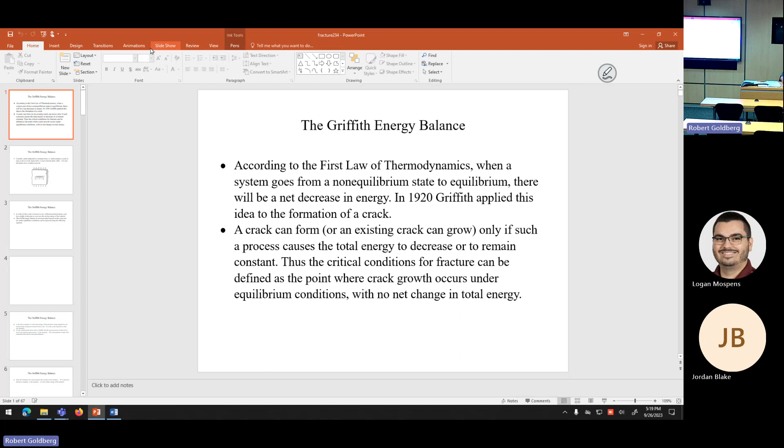Okay. So otherwise, here's my mouse. Here we go. And as far as I know, I shouldn't have any more travel for a while. So for the next period of time, we'll be just chugging along as usual.

And also, just to alleviate any worries you may have, if you follow the news, you've probably heard some talk of the potential of a government shutdown next week. But my teaching here has nothing to do with my job with the government. So even if the government shuts down, it will not affect class here in any way. If anything, I'll have a bit more time to devote to class prep and that type of thing.

So anyway, 2 weeks ago, at our last class, we started talking about fracture mechanics, and we first did the very simple maximum stress type of approach. But as we also talked about, there were some significant deficiencies with that methodology, which led other people to develop alternative methods of doing fracture analysis. So the first one we'll talk about is an energy balance approach that was developed by Griffith.

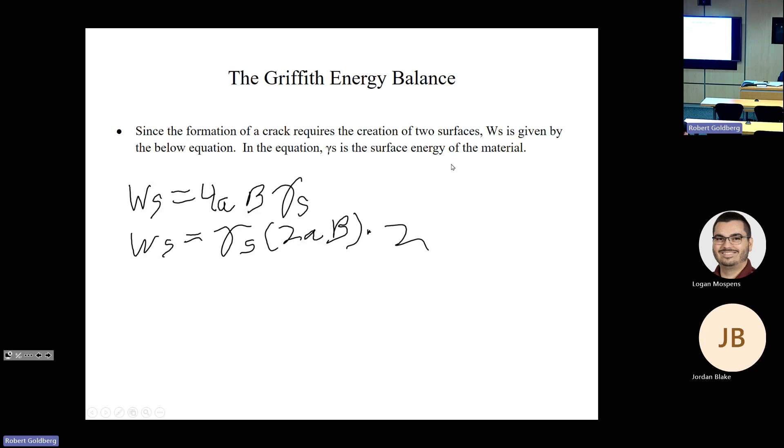And then we have to multiply this by 2 because, obviously, when we look here for a crack, we have 2 surfaces. We have the surface on the bottom, we have the surface on the top of the crack.

So what we're going to do is take these energy equations and assume a unit thickness. So our original potential energy equation was equal to capital pi equals the potential energy of the uncracked plate minus pi times sigma squared times a squared times b divided by E. And what we're going to assume for right now is that B is equal to 1.

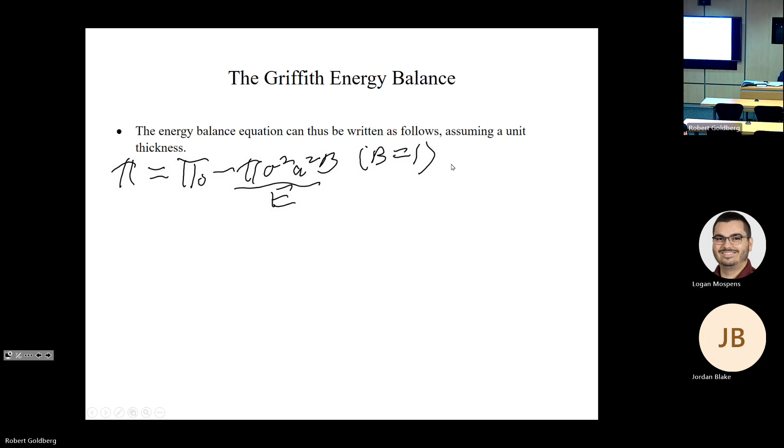So we can say that the negative, just to get rid of this minus sign here, of the derivative of the potential energy with respect to the half crack length A is equal to 2 times pi times sigma squared times A divided by E. And this is simply because the derivative of A squared is 2A. Everything else is constant. And likewise, we can say that our surface energy is equal to 4 times A times B, which we're assuming is equal to 1, times the surface energy. So the derivative of our surface energy with respect to the half crack length is just equal to 4 times the surface energy of the material.

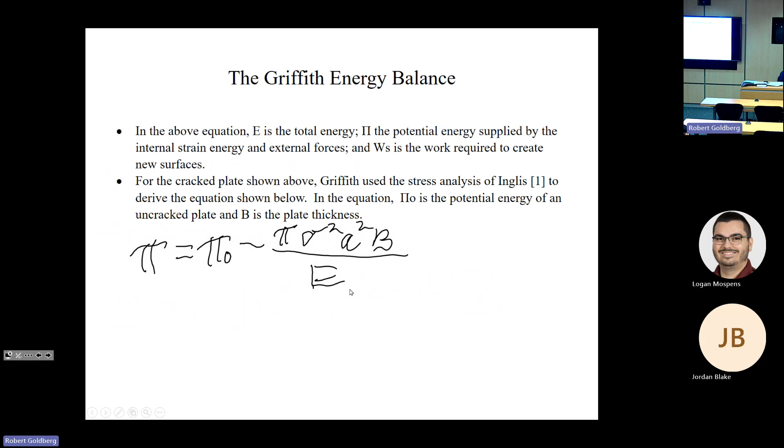So now we'll go back. When we did our quick energy balance discussion, we said that this term has to equal this term. And if it's true for the derivative with respect to the area, it's also true for the derivative with respect to the half crack length. So B is equal to 1. So what we can do is take this term here and set it equal to this term here.

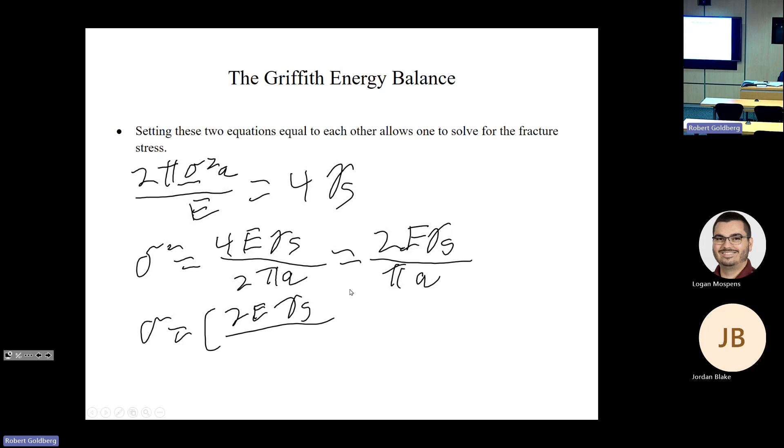And so we have that 2 times pi times sigma squared A over E is equal to 4 times the surface energy, and we'll solve for this fracture stress. So we get that sigma squared is equal to 4 E gamma S divided by 2 pi A. The 4 and the 2 cancel out, so it's just 2 E times the surface energy divided by pi times half of the crack length. And we take the square root of both sides. We get that sigma is equal to 2 times E times the surface energy divided by pi times the half crack length, to the 1/2 power, representing the square root. So this is the failure stress.

So for a material, if we know the surface energy, we know the modulus, we know the crack length, pi's pi, we can solve for the stress, for the applied stress that would be required to grow the crack and ultimately fracture the material.

Now, in these equations, it's important to note the distinction between the crack area and the surface area. So the crack area is defined by the projected surface area of the crack, which is twice the crack length times the thickness. But as we hinted at before, a crack has two surfaces. It has a top and a bottom surface. So the surface area of the crack is twice the area of the crack.

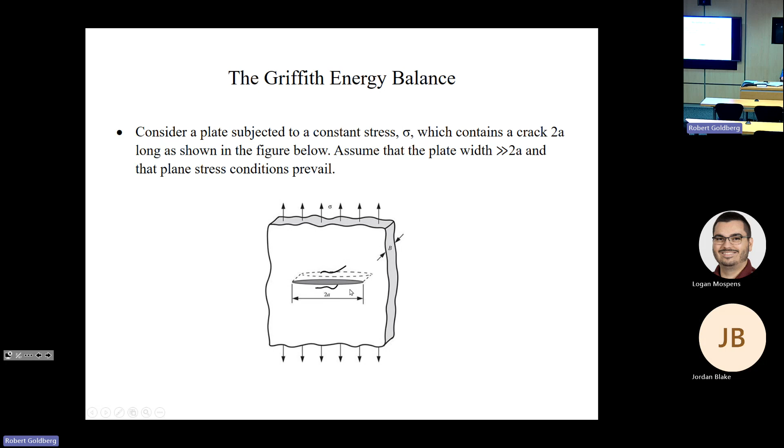So, what we went through here, I didn't emphasize it very much, but this was for the case of an infinitely sharp crack. Obviously, not all cracks are infinitely sharp, so we have to account for other types, sizes and shapes of cracks. Next week, when we start talking about stress intensity factor, based on the geometry of the crack, there are all kinds of different equations for all different shapes of cracks.

But for right now, for this discussion, we're going to talk about one other case. We talked about an infinitely sharp crack, but another very common shape of crack is what's called a penny-shaped flaw, where it's not a sharp crack, it's more like a circle or an ellipse representative of a penny. We're not going to go through the derivation, but you can get a similar expression for this case, where the failure stress for a penny-shaped crack is pretty similar. It's pi times the modulus times the surface energy divided by 2.

Now the difference is we have this extra term in here, related to the Poisson ratio. So you see, this is pretty similar to what we just developed. The difference is we've shifted where the 2 is located. In the original equation, the 2 was in the numerator for the sharp crack. Now for the penny-shaped crack, the 2 is in the denominator, and we also have this extra Poisson ratio term in there.

But one of the important things here, and you'll see this in a lot of our discussion, is that fracture mechanics calculations have to deal with the initiation and growth of cracks. In a lot of what we're going to do, the shape of the crack is going to lead to different results, because just by the nature of the geometry, different shaped cracks will react to applied stresses differently. So when you do calculations in the real world, it'll be very important to specify the shape of your crack.

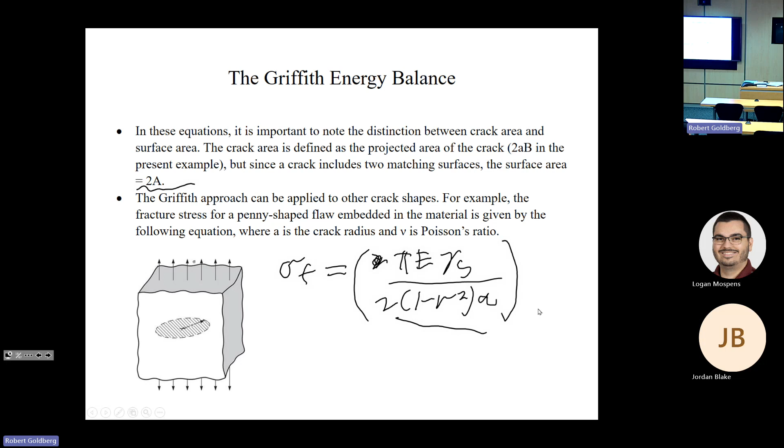And obviously, when you see our discussions and tables, things will be idealizations or approximations. They make these approximations because in a lot of cases, things are pretty close to sharp cracks, and what can be called a penny-shaped crack occurs a lot. But obviously, the real world is a lot different than the idealization. So in many cases, you have to pick the crack shape which is the closest match to what you have in your tables, and then go from there. So that's our introduction to

the Griffith energy balance. Now we're going to talk about how this criterion is similar and different from what we talked about 2 weeks ago, which was based on a more maximum stress type of criterion. You'll also remember we talked about, and we'll go into more detail on this in a little bit, that the crack tip radius was very important in the Inglis type of criteria. The Griffith model is based on a global energy balance, and for fracture to occur, the energy stored in the structure must be sufficient to overcome the surface energy of the material.

But the truth is, whether we do it by a stress approach or an energy approach, as I mentioned earlier, fracture still involves breaking atomic bonds. On the atomic level, where everything happens, the stress must reach or exceed the cohesive stress between your atoms. We talked about how exceeding the cohesive stress at the crack tip is necessary but not sufficient to cause fracture. So the failure stress equations developed for each of these two methods have a similar form, and the predictions of the global fracture stress from these two approaches are of the same order of magnitude when we're talking about a sharp crack. For a sharp crack, the Griffith model doesn't explicitly consider the crack tip radius, but the two equations are broadly consistent with each other.

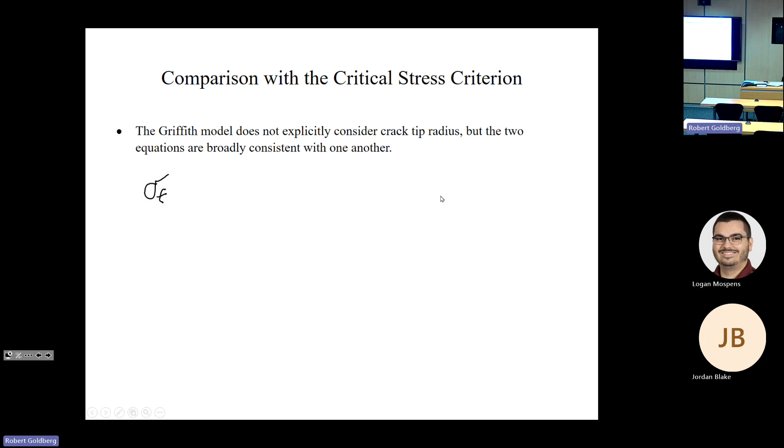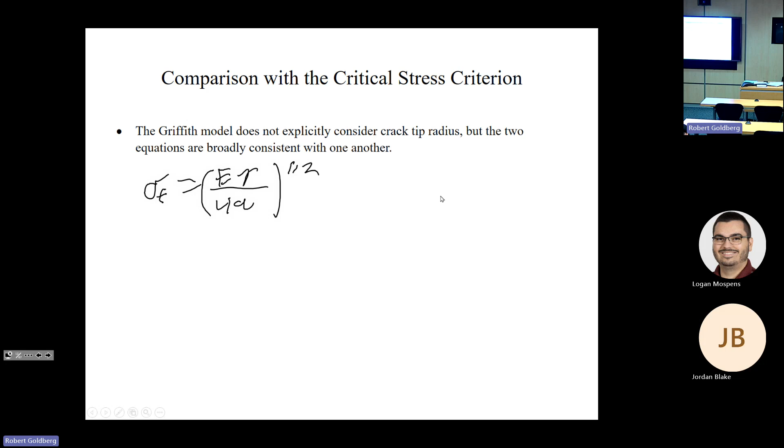So for the Inglis criteria, which was our maximum stress, we said that the failure stress was equal to the modulus times the surface energy divided by 4 times the half crack length to the 1/2 power, so the square root. And as we just derived with the Griffith, we have that the fracture stress for an infinitely sharp crack is 2 times the modulus times the surface energy divided by pi times the half crack length. And almost forgot the square root.

So these equations are different, obviously there are differences between them, but still the square root, they're both to the square root type of power. They both have modulus and surface energy, and they're both related to the crack length. And again, a reminder, this is for a sharp crack.

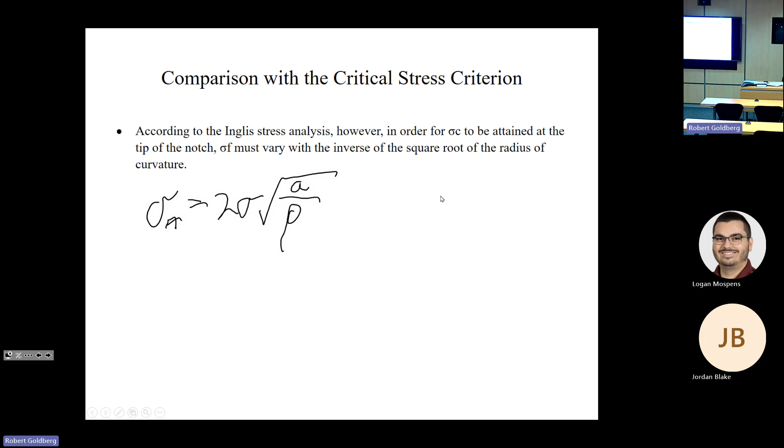So we talked about last time that with the Inglis criteria, this stress right here at the tip of the crack, sigma sub A, is significantly influenced by the radius of curvature. But in the equations we talked about with the Griffith criteria, there's nothing representative of the radius of curvature. So just for an example, consider a crack with this rho, this crack radius here, given as 5 times 10 to the negative 6, so 0.005 millimeters if I'm doing my calculations correctly.

So a crack like this, if you looked at it under a microscope, would appear to be very sharp. I mean, 5 times 10 to the negative 6 is a pretty small radius of curvature. It's 5 1,000ths of a millimeter. However, this radius of curvature is still 4 orders of magnitude larger than the atomic spacing in a typical crystalline solid. So what would happen as a result is that if you use the Inglis type of approach, you'd predict a fracture strength that's 100 times larger than the Griffith equation.

So as in many things, when you talk about approximations, the Inglis approach and the Griffith approach are bounds on the problem. And in many things, when you talk about mechanics, as I say, materials people never study mechanics or physics. So what happens is that the actual material behavior is somewhere between these extremes. The fracture stress does depend on the notch root radius, but not to the extent indicated by that equation here. So the apparent discrepancy between the stress criteria and the energy criteria based on thermodynamics, you can resolve by viewing fracture as a nucleation and growth process.

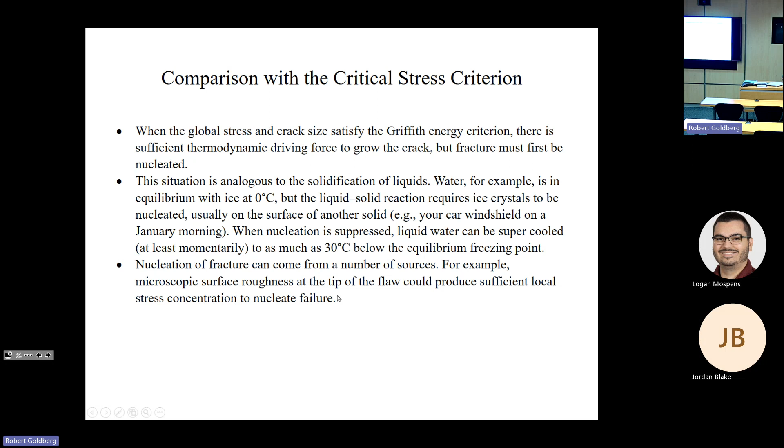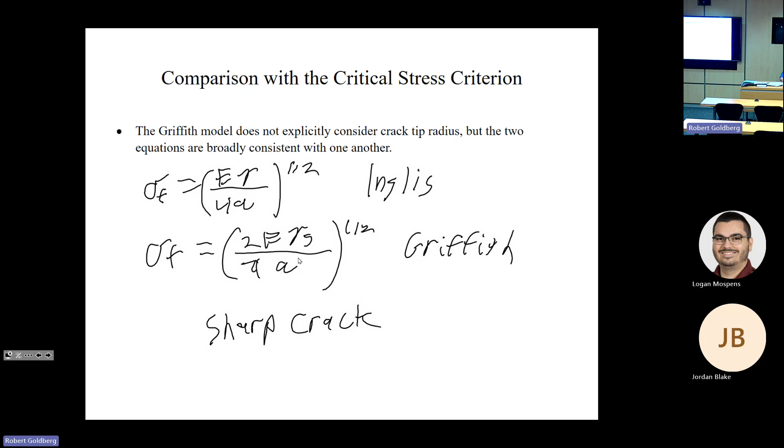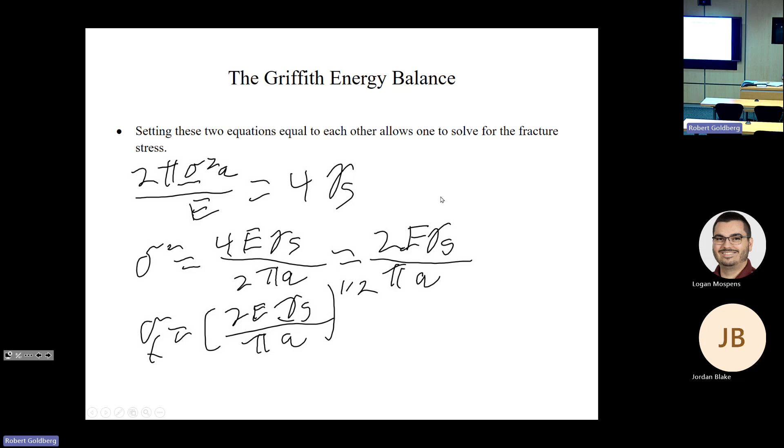So right in the area near the tip of this big crack, you concentrate the stress. You scale the applied stress, because remember, you have this applied global stress way out here, but right in this area near the tip of this big crack, your local stress is this local value, which is higher than the applied stress. So as far as the Griffith equation, the local stresses applied in the Griffith equation are not the applied stress, but the concentrated stress. And that'll cause this local crack to start propagating, because its local stress is high enough to trigger the fracture process.

So then this little crack here, once it grows sufficiently, will link up with the big crack. And instead of having a big macro crack and a small crack, you'll just have this one big crack. With the bigger crack length, if the Griffith equation is satisfied globally, then this big crack will start to grow. An example of this type of specific mechanism is that in ferritic steels, it causes cleavage fracture. Cleavage fracture. So any questions on this?

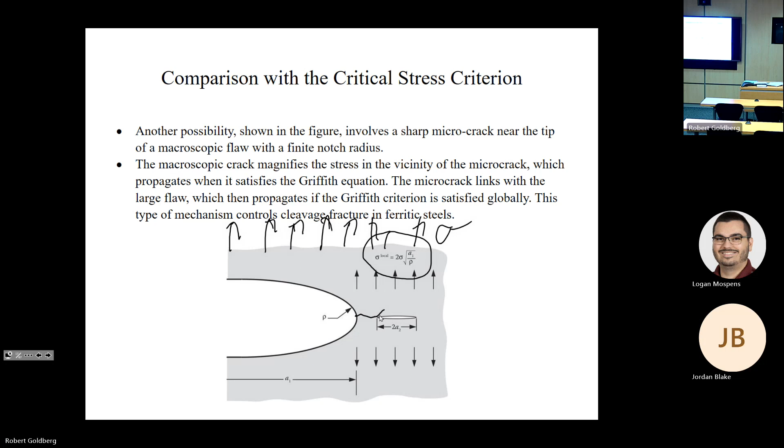So moving on. From the original Griffith equation, there were modifications that were made. The Griffith equation, as developed and as we talked about, is valid only for ideally brittle solids. When you look at glass, which is the stereotypical brittle material, Griffith obtained a good agreement between his equation and the experimental fracture strength of glass, but the Griffith equation severely underestimates the fracture strength of metals, because obviously metals are not brittle, they're ductile.

At a point, you even have local plasticity in there, which we'll talk about. In another week or two, we'll get a lot more into what happens when you start getting plasticity at your crack tip. But anyway, Irwin and Orowan independently modified the Griffith expression to account for materials capable of plastic flow. This is still our sharp crack, but instead of a brittle material, we have a material that's subject to plastic flow. So what Irwin and Orowan came up with was that the fracture stress is equal to the square root of twice the modulus times, instead of just the surface energy, an additional energy, gamma sub P, to the 1/2 power, which is the plastic work per unit area of surface created.

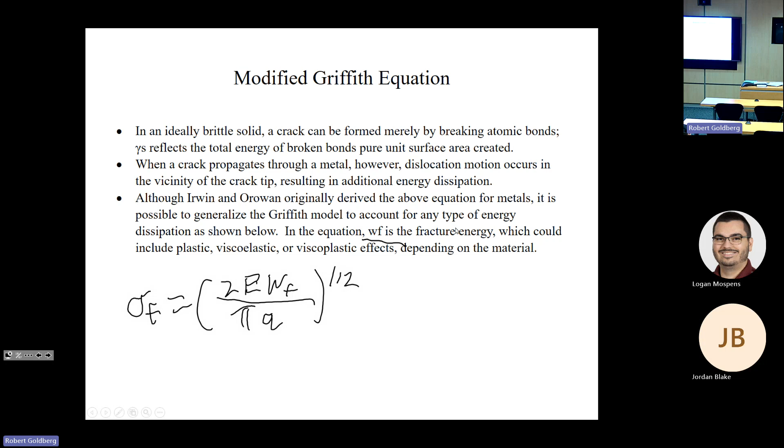So the idea is, depending on your material and the loading and various things, the fracture energy can be influenced by a whole variety of things which increase the surface area. So first we have our ideally brittle material, where the only thing that leads to the propagation of the crack is the breaking of atomic bonds. Then we have this case here, which also allows for plasticity, where we have the breaking of atomic bonds, but we also have some plasticity right at the crack tip. So our failure energy is both due to the breaking of bonds and the plasticity.

And then we also have a more complicated thing which occurs in some materials, the idea of branching. A lot of times in what we're doing, we're going to assume that a crack opens up and just progresses in a nice regular way. But in reality, cracks can form branches, cracks can go off in a variety of directions. So that's another thing which can affect the total failure energy: not just one crack propagating in a nice straight way, but also a crack propagating in an irregular fashion. And there are certain materials and certain loading conditions where accounting for this is what you really want to do to totally account for the failure energy in your problem.

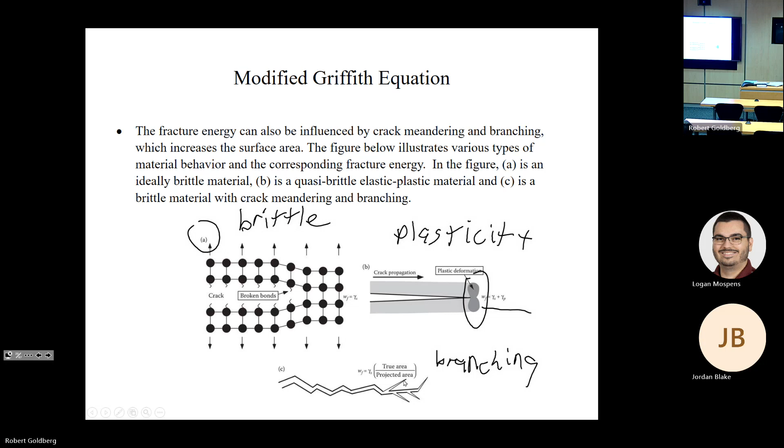So we'll finish this section with a fairly quick example problem. Here's our problem again that we talked about. We have a brittle material, and similar to what we talked about before, we have a big crack with a half length A1 and a radius of curvature rho. And here we have our mini crack, to the right of it with its own crack length, located near the tip of the larger flaw. So what we need to find is the minimum size of this micro crack. What's our value of A2 that's going to cause this mini crack to grow to the point where it'll then link up with the big crack and overall cause failure?

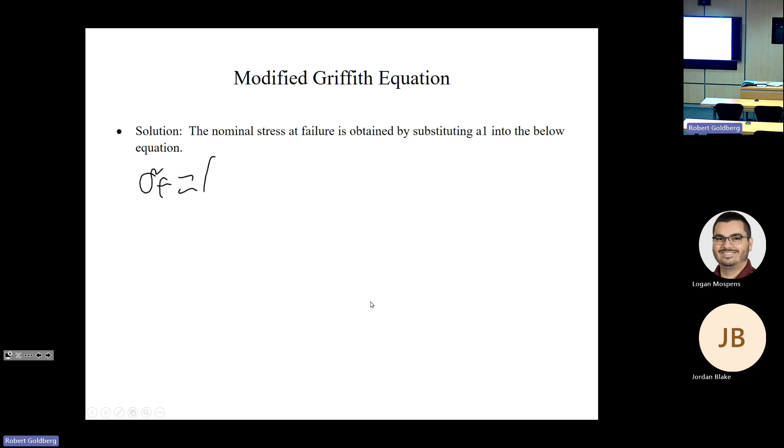And we'll be using just the Griffith criteria to solve for this. So what we have is that our nominal stress at failure for the big crack is, we have our failure stress is equal to 2 times modulus times our surface energy,

and something I forgot to mention is that this mini crack here, this is a penny-shaped crack. So we're going to use the equation that I wrote for penny cracks. It's not a sharp crack. That'll be important in a sec.

So anyway, for our big crack, we have 2 times the modulus times the surface energy divided by pi times half of the crack length for the big crack, all taken to the 1/2 power. And so that's the stress that will lead to failure of the big crack.

And what we also know is that at the tip of the, yeah, okay, we'll do this on the next slide. So what we can say is, that stress we just wrote is the stress that would ultimately cause this big crack to fail.

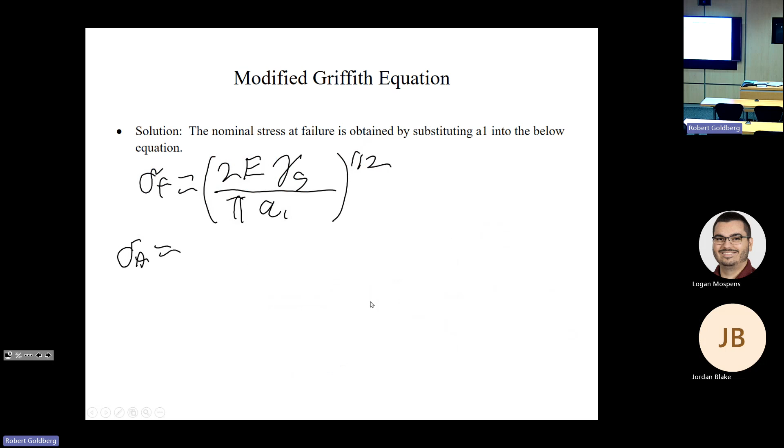Now what we're going to do is look at what is the stress right here, right in the area of the tip of this big crack. For that, we can say that the stress at the tip of the big crack, and this is where we use the Inglis criteria, is twice the global applied stress multiplied by the square root of the ratio of the half crack length and the radius of curvature.

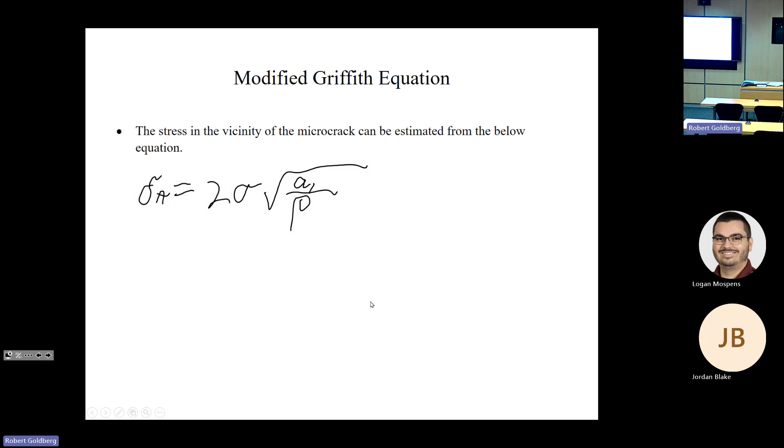So for the little crack, the penny-shaped crack, the stress that will result in failure of the mini crack, because it's penny-shaped, is equal to pi times the modulus times the surface energy divided by 2 times 1 minus the Poisson ratio squared multiplied by A2, all this to the 1/2 power. And this A2 now is the half crack length of that mini crack, that little crack that's right at the tip of the big crack.

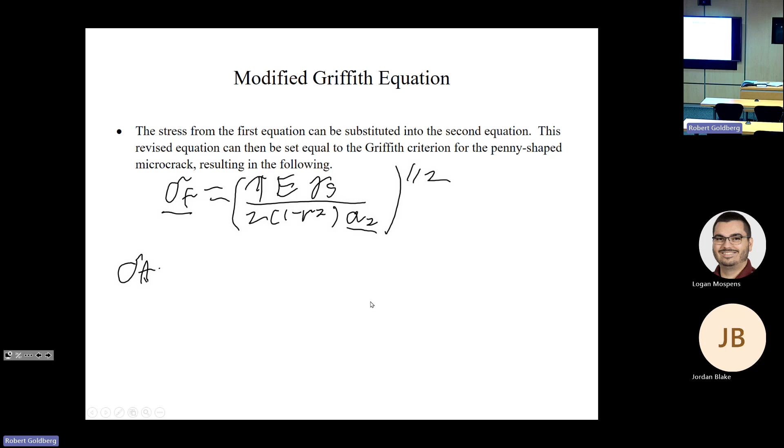So for this failure stress, we know that the stress that this little crack sees is that concentrated stress, which is equal to 2 times the stress in the region of the crack multiplied by the square root of A1 over rho. But what we know from the big crack is that this stress here is the stress that will lead to failure. So by the Griffith criteria, that's equal to 2 times the modulus times the surface energy divided by pi times A1, all to the 1/2 power.

So we take this stress and plug it in here. And so we get 2 times 2E gamma S over pi times A1, all this to the 1/2 power, multiplied by the square root of A1 over rho. We use this for the stress. So this is the stress that is seen by the mini crack due to the stress concentrations.

So this will be the stress that leads to failure of that mini crack, because this is the stress that it's subjected to. So this is what we set equal to pi times E times gamma S over 2 times 1 minus nu squared times A2, all to the 1/2 power. So now the only thing that's unknown here is A2.

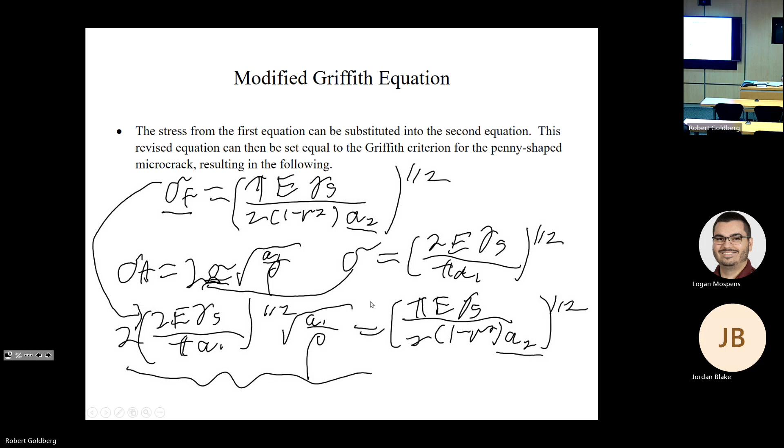This is the stress that the little crack sees, and it's all related to these other things related to the big crack, and we set it to the criteria which causes failure. So what we're solving for is the half length of the mini crack that will lead to the failure stress specified here. So we can do some algebra. After some algebra, we get that A2 is equal to pi squared times the radius of curvature divided by 16 times 1 minus nu squared.

Okay? So we use the big crack to say this is the stress in the area of the little crack caused by the fact that it's magnified because we have the big crack there. And then given that stress that'll cause failure, what's the crack size of the little crack that'll lead to that stress? Okay.

So, a couple of other points. For a Poisson ratio of 0.3, which is kind of a standard value of Poisson ratio, the half length of the microcrack is 0.68 rho, which would mean that the total crack length is about 1.4 times the radius of curvature. What this means is the nucleating microcrack is approximately the size of the crack tip radius. I mean, 1.4 is a little different, but it's not like it's 10, 100, 1,000.

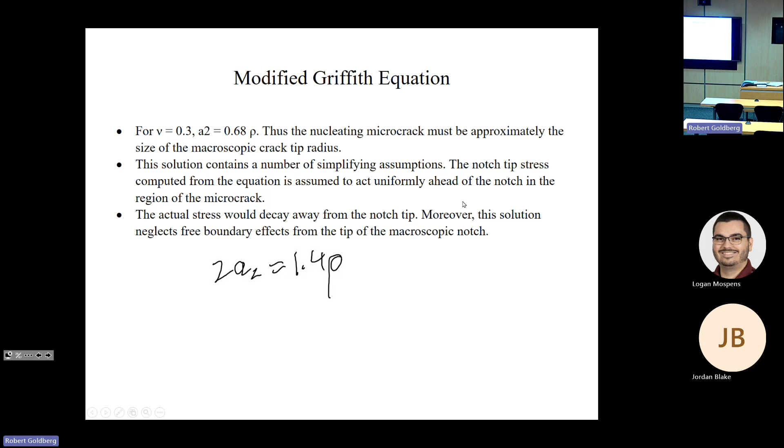So for this little microcrack to affect the big crack, it has to be at least as large as the crack tip radius. Now, this solution contains several simplifying assumptions, as most simple problems do. The notch tip stress computed from the equation is assumed to act uniformly ahead of the notch in the region of the microcrack. In reality, you would have your maximum stress here, and then as you progress along, you would have a decrease in your stress. So your stress, exaggerating a lot, would be something like this. We just assume that the stress right at the tip stays constant all the way along the length. So that's a simplified assumption.

And the other thing that we didn't account for is that because this is a boundary here, you would likely have some boundary conditions involved. But this is a simplified problem. We're neglecting that, and it gives us an idea, and with everything in the dimensions and the effects of everything, it's probably still good enough. So, any questions on this?

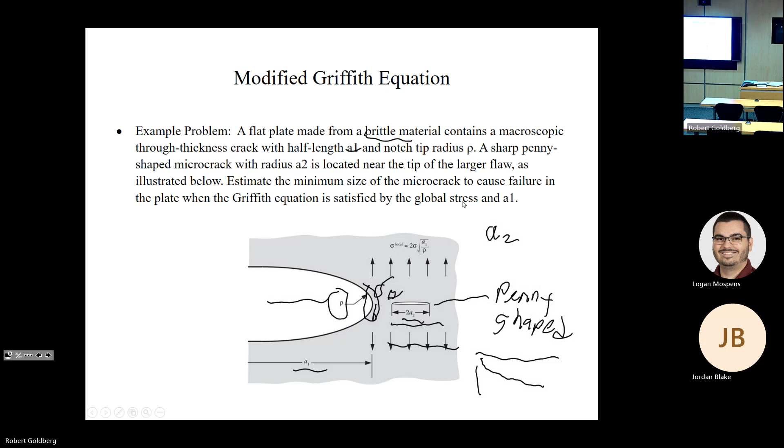Okay, so this is actually a good point. So we'll take our break here and we'll come back at about 20 after.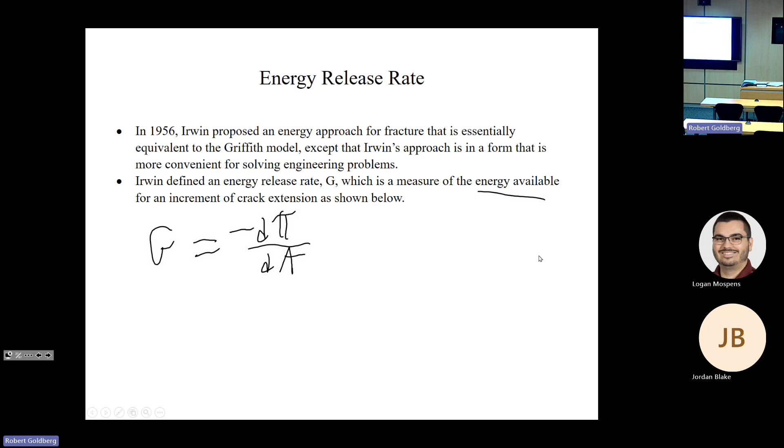engineering problems. So Irwin defined an energy release rate, and we'll call it G, which is equal to the negative of the derivative of the potential energy with respect to crack area. So this energy release rate is a measure of the energy available for an increment of crack extension. Now, an important point to note: when we talk about rate here, it's not that you normally think of rate in terms of the derivative of something with respect to time. This energy release rate is the rate of change of potential energy with respect to crack area. And since this G is obtained from the derivative of potential energy, it's also called the crack extension force or the crack driving force.

Based on work that we discussed earlier, and not going through the full derivation, we talked about before that the potential energy is equal to our initial minus pi times the stress squared times the half length squared times the thickness divided by the modulus.

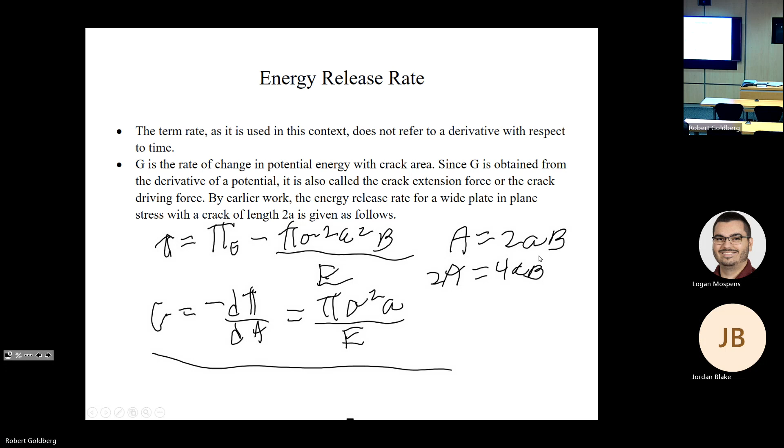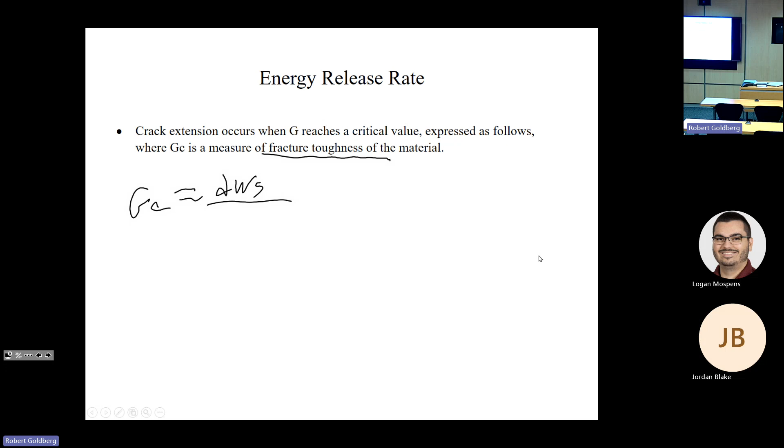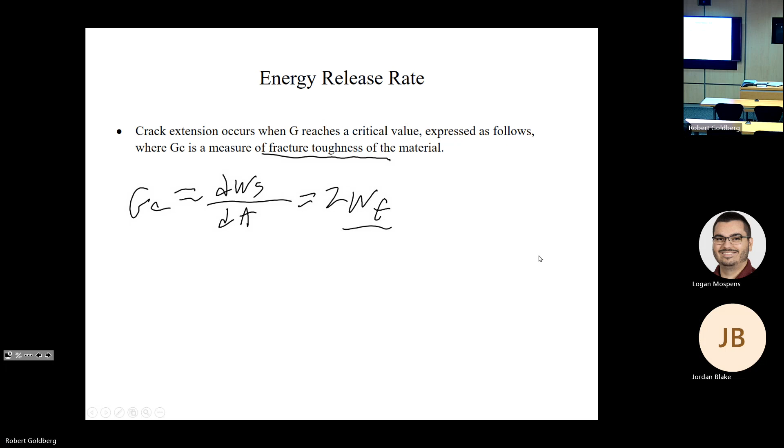Based on this definition, we say that crack extension occurs when the energy release rate reaches a critical value. This critical value is G sub C, which is also referred to as fracture toughness. We can also say that, again based on equations we had earlier, it's equal to the derivative of the total surface energy, the strain energy, plastic energy, what have you, with respect to the area, which is equal to twice the surface energy. And the potential energy of the elastic body is equal to the strain energy stored in the body minus the work done by external forces.

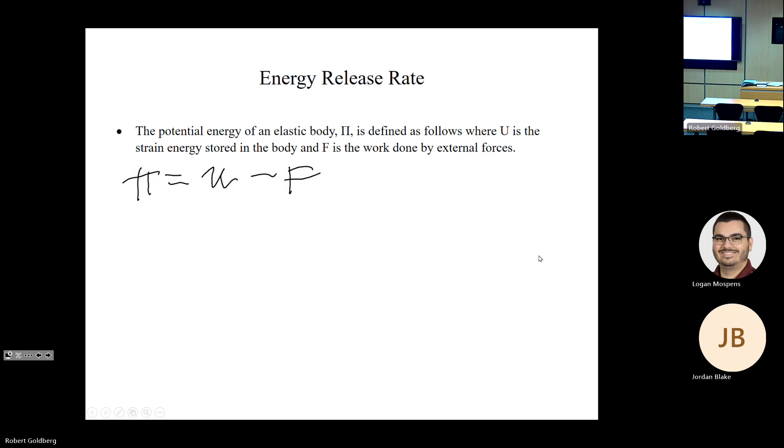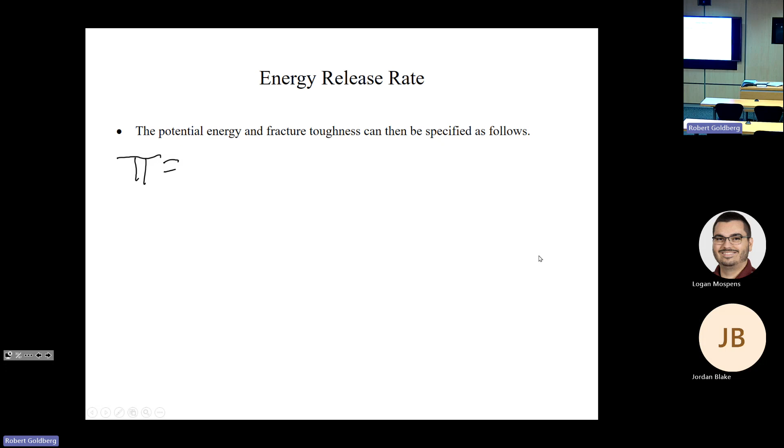So we can specify the potential energy and fracture toughness as follows. We know that our potential energy is equal to the negative of the strain energy, and we know that our strain energy release rate is equal to the negative of the derivative of the potential energy with respect to area. And here, this B term is the thickness of the plate. So it's equal to 1 divided by the thickness of the plate times the derivative of the strain energy with respect to the crack length. And this is all for the case of a constant load. So it's equal to 1/B times d/dA of 1/2 P delta. What we can do is pull the 2 out as a scalar, and it's a constant load, so we can pull P out. So it's equal to P over 2B times the derivative of the displacement with respect to the half crack length, all for the case of constant applied load.

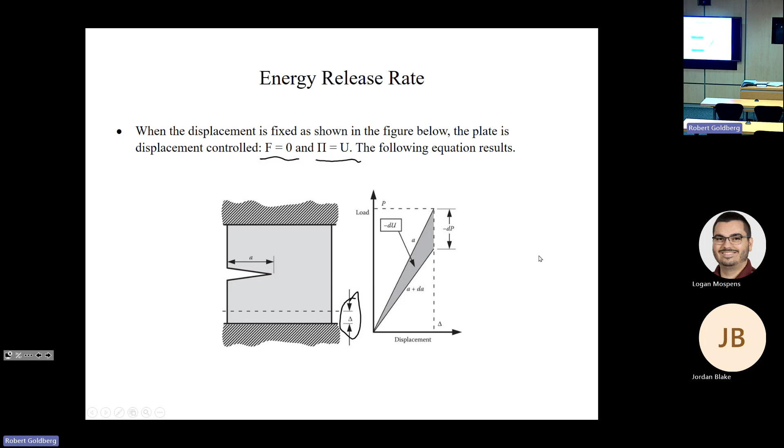Now there's another case we can look at. It's the same type of thing. We still have our plate with the crack, but now instead of an applied load, we apply a displacement. So when the plate is displacement controlled, we know that our force is equal to 0, and the energy due to applied forces is equal to 0, and the work done by external forces is equal to 0 because we have no external forces. The potential energy is just due to the strain energy. So by the same type of idea, we can say that the strain energy release rate is negative 1 over B, the derivative of the strain energy with respect to the crack length, only holding the delta constant.

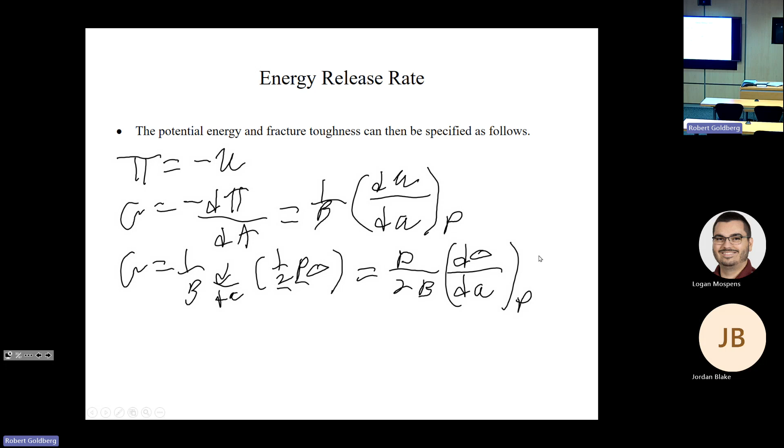The difference here is that, similar to what we have here, except instead of pulling the load out, we can pull the displacement out because the displacement is constant. So when we do that, what we end up with is that our strain energy release rate is negative delta over 2B times the derivative of the load with respect to crack area, all for the case of a specified displacement. So these are extreme cases, and in a little bit we'll talk about what happens when you don't have the extreme cases.

But what we have is... But for right now, what we'll do is we'll introduce a term called the compliance, which is the inverse of the plate stiffness, and we're going to say that this compliance term is equal to the displacement divided by the load. And so given that, we can manipulate the equations

we had. So for example, for the case of the applied load, we had the strain energy release rate is equal to the load over 2B times the derivative of delta with respect to A, all for the case of applied load. So we can substitute in from this expression here, we know that delta is equal to the compliance times the applied load. So we have P over 2B times the derivative with respect to A of the compliance times the load,

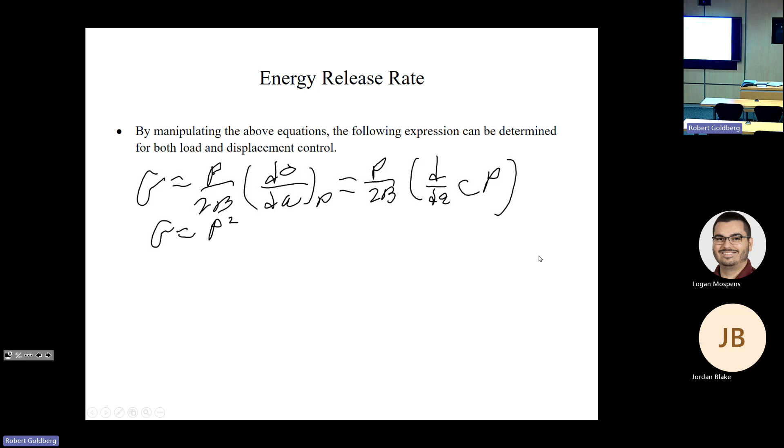Compliance by the load, and we can pull once again the load out. So we have that the strain energy release rate is equal to P squared over 2B times the derivative of the compliance with respect to the crack length. And if you go through a similar argument, you get the same equation for the case of displacement control. So it's just plugging in the definition and still using what's constant. And obviously what you do for the second case, you would say that the displacement is equal to the compliance times the load. You pull things out, or do the derivatives, and you get that same idea.

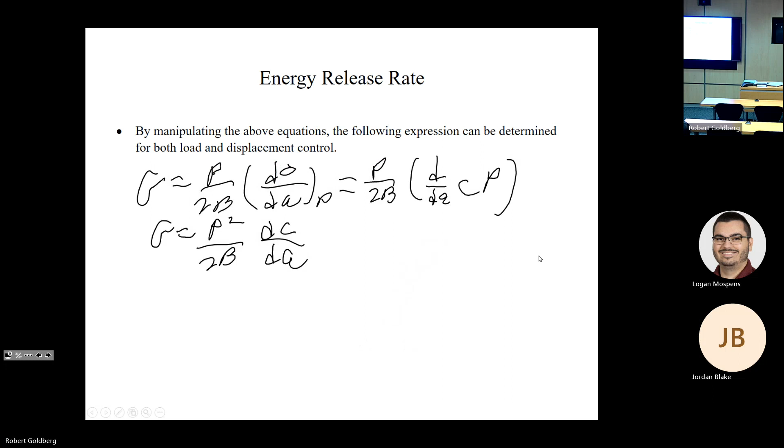So here we go. And by the way, something I forgot to write down before, we can also say that the derivative of the strain energy with respect to crack length for the case of load control is equal to the negative of the derivative of the strain energy with respect to crack length for the case of displacement control.

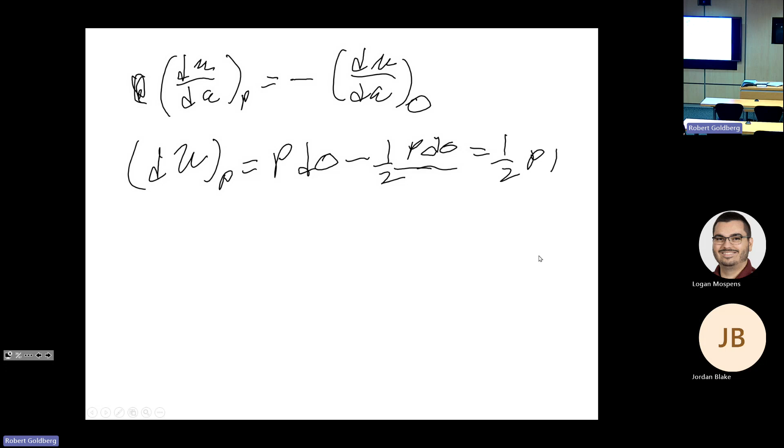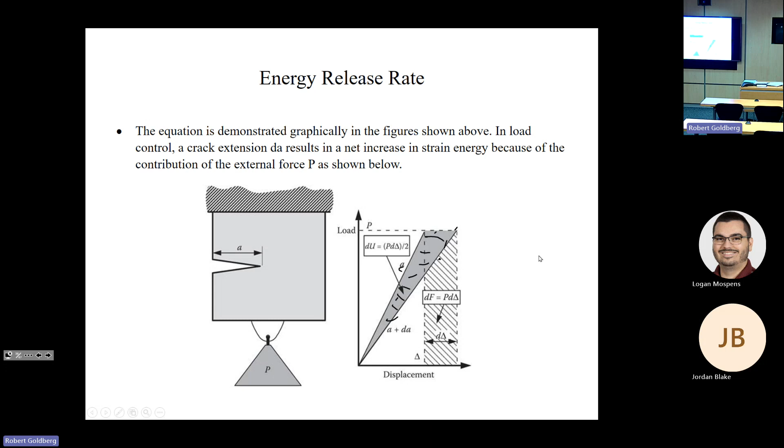But anyway, for the case of load control, we can have our increase in strain energy equal to, if you manipulate the geometry of the figures, P times the change in displacement, minus 1/2 the load times the change of displacement. So it's just equal to 1/2 of the load times the change in displacement. And this is due to the idea where we take the new energy due to this revised triangle, and we subtract off the energy due to the previous one. And so that's how we get that.

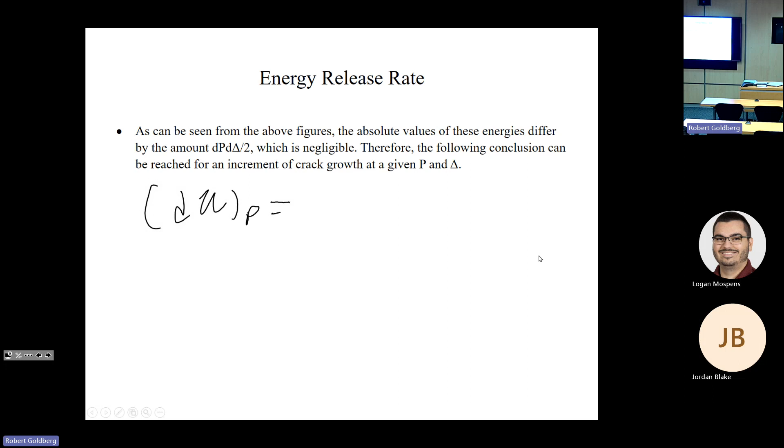And conversely, when the displacement is fixed, the change in the work due to external forces is 0, and we can also get that the change in our strain energy due to displacement is equal to the differential of the load times the displacement divided by 2. And this change in load term is negative. So the absolute values of these energies differ by an amount, dP times d delta divided by 2, which is negligible. So what we can say then is, for cases of load control and displacement control, the change in strain energy due to load control is just the negative of the change in strain energy due to displacement control.

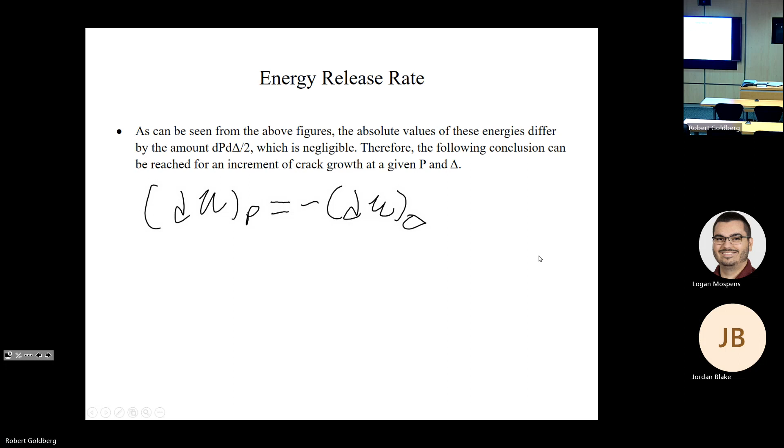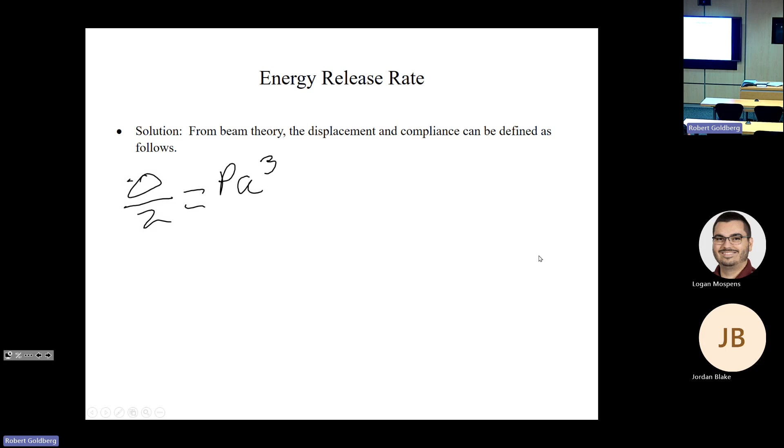So the way we'll do it is these equations just come from beam theory. So we can say that half of the displacement is equal to the load times the crack length cubed divided by 3 times the modulus times the moment of inertia, and the moment of inertia is equal to the thickness times the height cubed divided by 12. And when we talk about the moment of inertia, we're talking about the moment of inertia of this half section here. You see that the h is the height of this half section here.

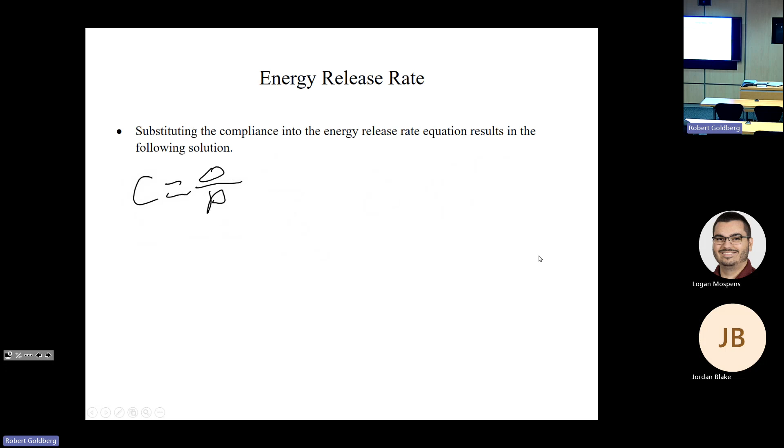So what we can say is we know that the compliance is equal to the displacement over the load, and taking this equation here and just manipulating it a bit, we get it equal to 2 times a cubed divided by 3 times the modulus times the moment of inertia.

So now we know that our energy release rate is equal to P squared divided by 2b times the derivative of compliance with respect to the crack length a. And so we now have our compliance very nicely defined in terms of the crack length. So we can just take P squared over 2b times the derivative of this with respect to a.

So it's equal to 6a squared over 3EI. Our 6, 2, and 3 cancel out. So we get our energy release rate is equal to P squared a squared over b times E times I.

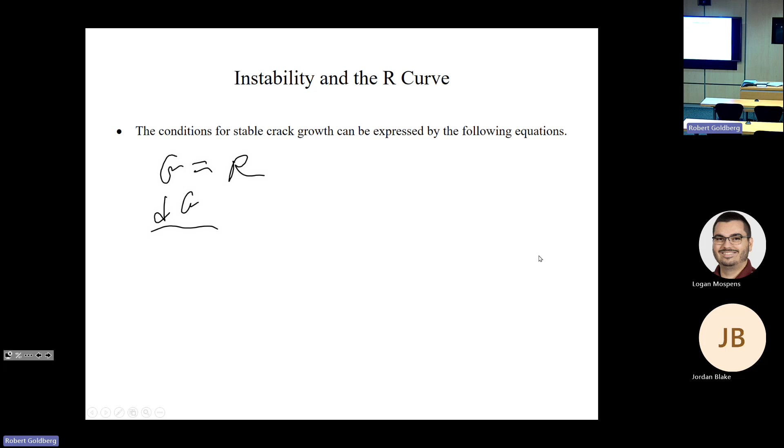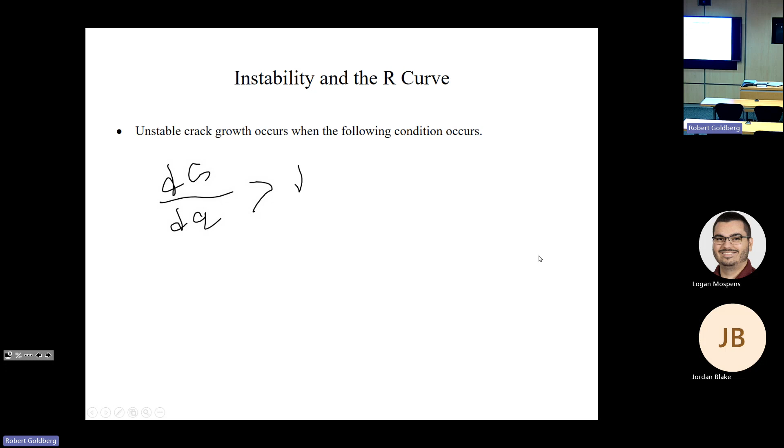And in words, that's all this is, which I just said. So the conditions for stable crack growth can be said as: when your strain energy release rate is equal to your resistance, it's stable, and when the rate of increase of your strain energy release rate, your driving force, is less than or equal to the rate of increase of your resistance as a function of crack length. And as we talked about, unstable crack growth then occurs when the rate of increase of your driving force, the strain energy release rate, becomes greater than the rate of increase of your resistance.

Now, one thing to note is that when your curve is flat, you can unambiguously define your fracture toughness, your critical value of energy release rate. It's very simple. When you hit this particular value of energy release rate, it goes unstable and your crack grows like crazy. So this one is easy. However, for your material with the rising R curve, it's a lot harder to determine uniquely a single toughness value.

So by this equation, we say that unstable crack growth occurs when the rate of change of your strain energy release rate is greater than the rate of change of your resistance. However, this point of tangency, the point where it becomes tangent, depends on the shape of your driving force curve. So it depends on the shape of your strain energy release rate with respect to crack size, and that depends on the configuration of your structure.

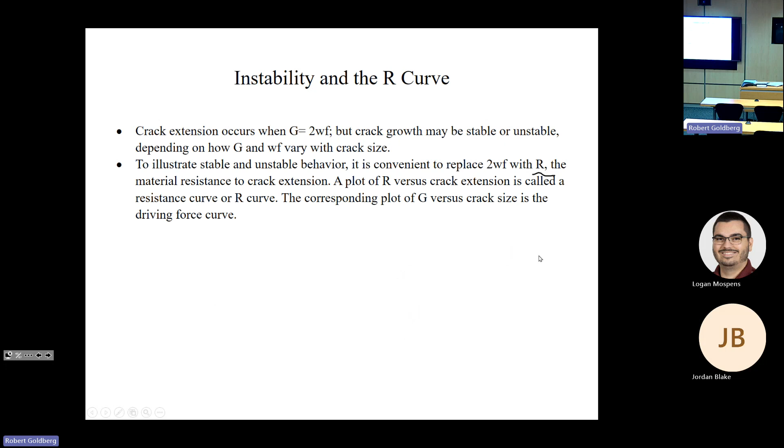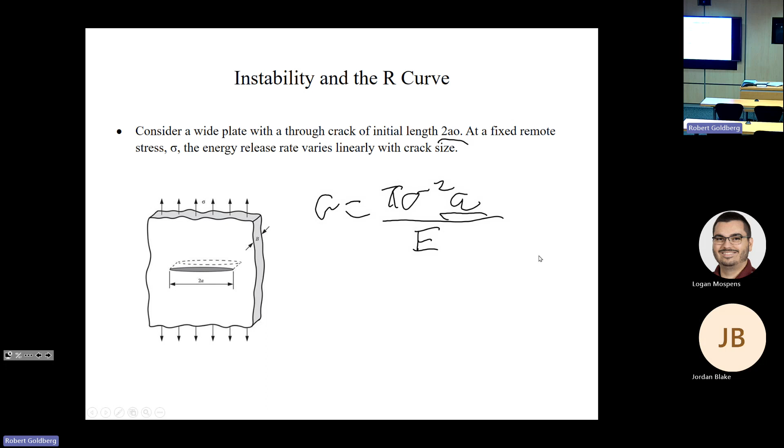So for this flat curve case, no matter what your crack looks like, when you hit this critical strain energy release rate, things fail. However, the slope of G, the curve of strain energy release rate versus crack size, is different depending on whether it's a through crack or a DCB specimen or different types of configurations. So for the through crack in a flat plate, it's linear, but in the double cantilever beam example, as we talked about in our example problem, G increases with the square of the crack size, where in our baseline equation for a through crack, G increases linearly with the crack size.

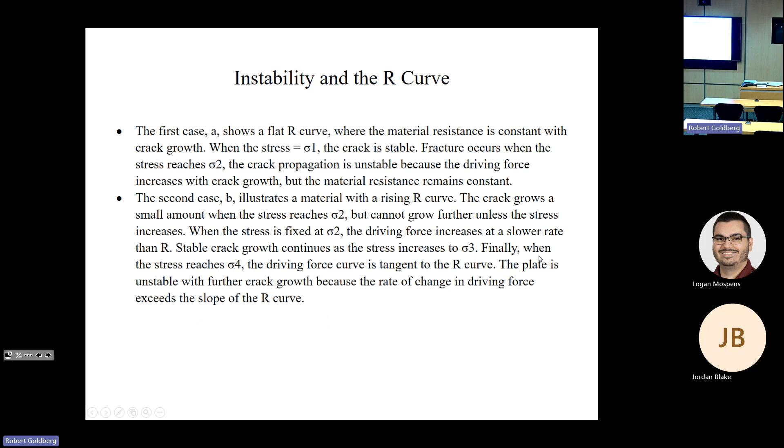So this curve here will look, for the case of a through crack, like nice linear curves. For a DCB specimen, they would be quadratic curves. So the resistance would still have the same shape, but the shape of this strain energy release rate versus crack size will be different. So the different configurations have different GC values for a given R curve. So materials with rising resistance curves can be characterized by the value of the strain energy release rate at the initiation of crack growth.

And this initiation toughness is usually not sensitive to structural geometry, but there are other problems with this measurement. One of the big ones is that for most materials, if you're doing a fracture test, it's hard to determine the precise moment of crack initiation. We'll talk about this later in the semester when we talk about test techniques, but an engineering definition of initiation is similar to the idea that when you do yield analysis of metals, you use a 0.2% offset, that you say that the yield stress occurs when you have 0.2% plastic strain. And so that's one way to look at it.

Another limitation of this initiation toughness is that it characterizes only the onset of the crack growth, and it provides no information on the shape of the R curve. So it's just one of these typical things that you see in engineering, where we talk about the theory, things look great when we put them on paper, but when it actually comes time to do real experiments and really characterize things, things aren't always quite that easy.

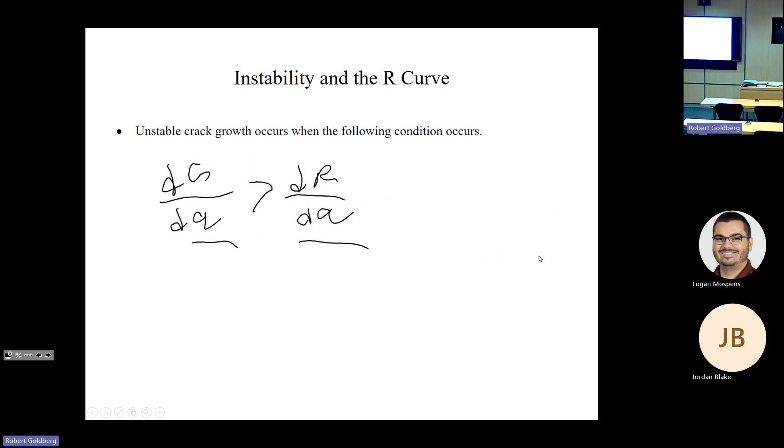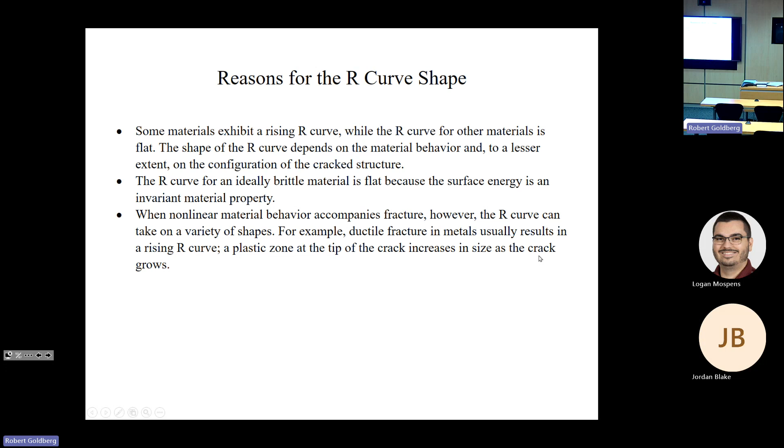However, for metals, where we have some localized or not so localized plasticity taking place, for a nonlinear material behavior, the R curve can take on a variety of shapes. For example, ductile failure in metals results in that rising R curve that we showed because the plastic zone at the tip of the crack increases in size as the crack grows, which means that we'll have a growth in resistance relating to the plastic flow, because when the material is deforming plastically, that energy that may go into the propagation of cracks instead goes into the propagation of the plastic flow in the material. So the driving force has to increase in these materials to maintain crack growth.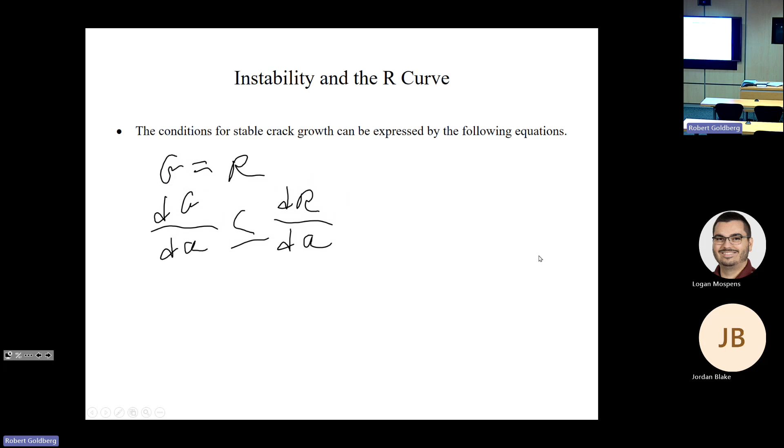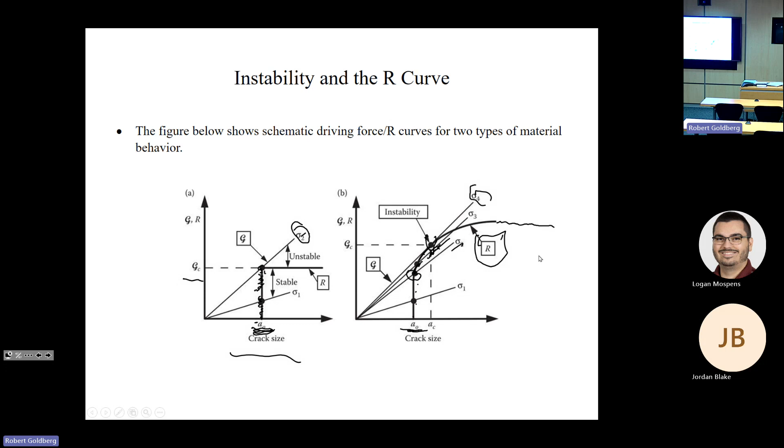So if the cracked body is infinite, what that means is if we have a plastic zone that's really, really small compared to the dimensions of the body, the plastic zone size and the resistance eventually reach some steady state value. And then instead of just a continually increasing R curve, it's kind of hinted at here, at some point the R curve reaches some asymptotic value and even goes somewhat flat. And what's even crazier is some materials can display a falling R curve.

So when a material fails by cleavage, for example, the material resistance is provided by the surface energy and the local plastic dissipation. So if crack growth were just stable, the R curve would be relatively flat. However, cleavage propagation is normally unstable. The material near the tip of the growing crack is subject to very high strain rates, which suppress plastic deformation. And the resistance of this rapidly growing cleavage crack is less than the initial resistance at the onset of fracture. So this is the idea of static friction versus sliding friction, where it takes more force to move a stationary object from its initial position than is required to maintain the sliding motion.

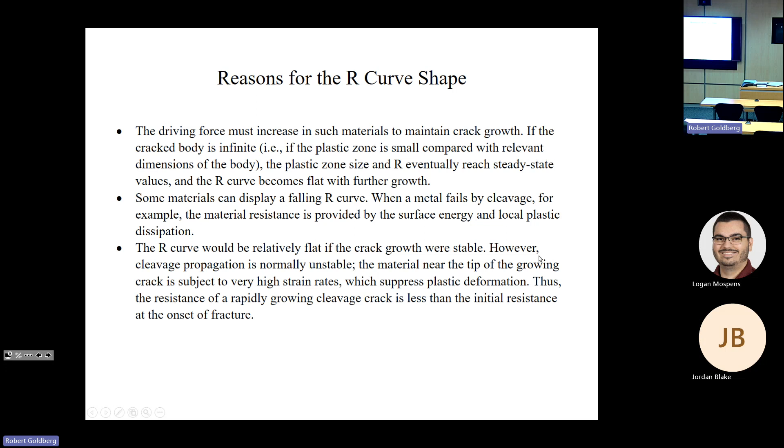That's the same idea: if you're starting to have an increase in things, things start to move, things start to deform. It takes less energy to keep things moving. And as we talked about a little bit, the size and geometry of the crack structure can exert some influence on the shape of the R curve.

So a crack in a thin sheet produces a steeper R curve than a crack in a thick plate because the thin plate is closer to a plane stress problem. So we have a low degree of stress triaxiality at the crack tip, whereas in a thick plate, not only is it not plane stress, but it may actually be in plane strain. So you'll have stresses in all your directions. And if you have stresses in all your directions, it increases your local stress concentrations, which can facilitate crack growth.

And just if this wasn't all complicated enough, the R curve can also be affected as you approach a free boundary. So a wide plate may exhibit a somewhat different crack growth resistance than a narrow plate, because when your crack gets near your boundary, all of a sudden you have boundary effects that come into play, and boundaries promote stress concentrations, which is another thing which can lead to the growth of your cracks.

Now, in a perfect world, the R curve, as well as other measures of fracture toughness, should be a property only of the material and shouldn't depend on the size or shape of the cracked body. Because when you're designing a structure and using a material, you want something that you can look up in a handbook and say, this is the value. I plug this into my hand calculations, my analytical methods, or my computer code, and say, this is what I can do. This is what I use.

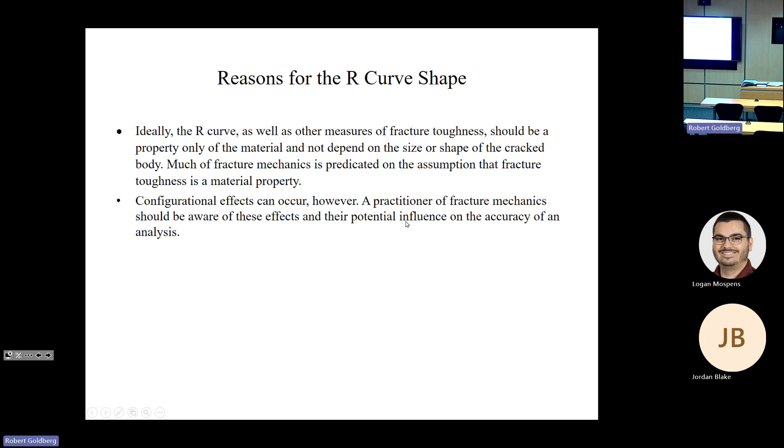So a little more on our discussion of the R curve. It's load control versus displacement control. So the stability of the crack growth, as we talked about, depends on the rate of change of the strain energy release rate, which is the second derivative of the potential energy. And this driving force is the same for both load control and displacement control. The rate of change of this driving force depends on how the structure is loaded. And displacement control tends to be more stable than load control.

So as shown in this figure here, with some configurations, when we talk about displacement control, that's these dotted lines here. When we increase our crack size, we actually have a decrease in the strain energy release rate as a function of crack size. So let's look here as an example. We have a cracked structure subjected to a load P2 and a displacement delta 3. If the structure is load controlled, it's this load curve which determines how things vary. At this point here, the tangent of our resistance curve, which is this thick line, is equal to the tangent of our strain energy release rate with respect to crack size for this load.

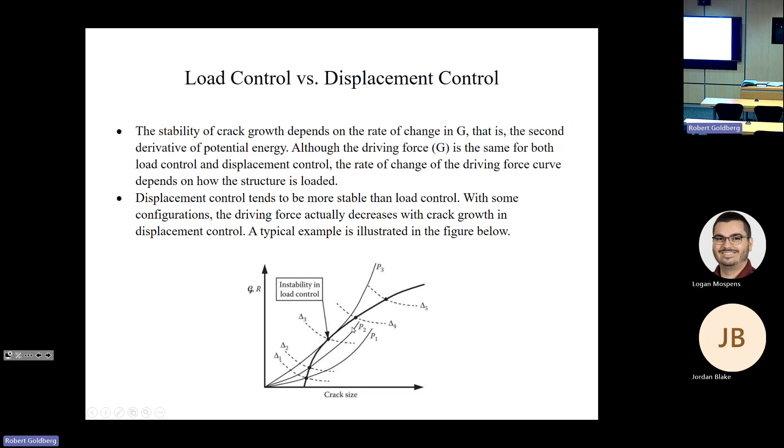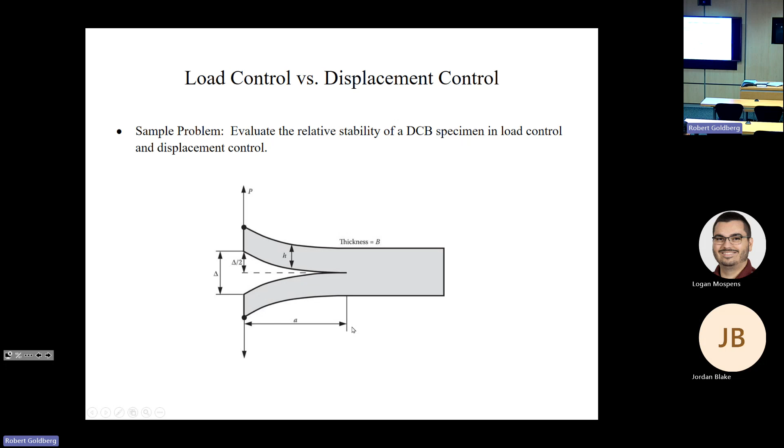So one more example problem. We're going to evaluate the relative stability of our DCB specimen in load control and displacement control. From the result derived earlier, we found that our strain energy release rate is equal to P squared times a squared over B times E times I. And when we substituted in the definition of the moment of inertia, we got 12 times P squared times a squared divided by B squared h cubed times E.

And for the case of load control, we can say that the derivative of the strain energy release rate with respect to crack size, holding P constant, when we do the math, is equal to 2 times P squared times a divided by B E I. We just use this expression when we did the derivative. And if we compare to our initial definition of the strain energy release rate, we can say that it's twice the strain energy release rate divided by the crack length.

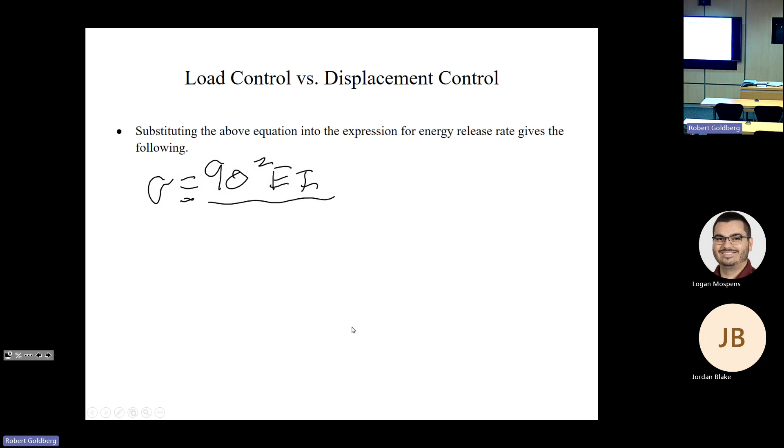So taking this expression into the expression for energy release rate, what we get is our energy release rate is equal to 9 times the displacement squared times the modulus times the moment of inertia, and this negative here, divided by b times a to the 5th. And if we simplify, it's -4 times the strain energy release rate divided by the crack length. What we did here is we know for displacement control what the P is, we stuck it in here, we squared the P, and we canceled terms and did some algebra.

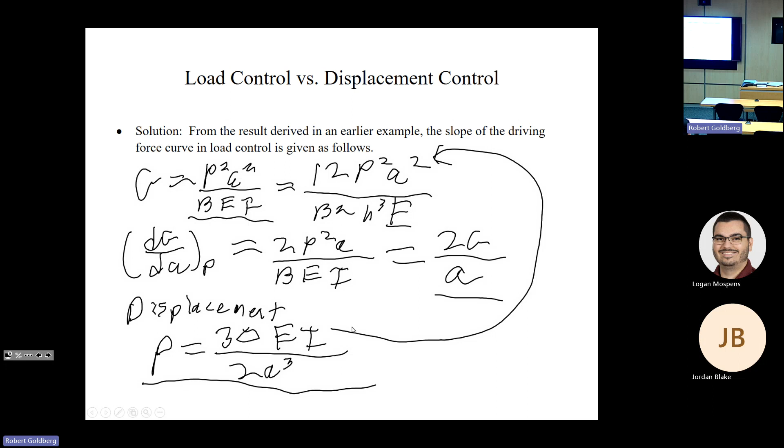So the point from this is that the driving force, the rate of change of the strain energy release rate with crack length, increases with load control because this is positive, and because this is negative, it decreases with displacement control. So for a flat R curve, for that example we talked about before, the crack growth in load control is always unstable, while displacement control is always stable.

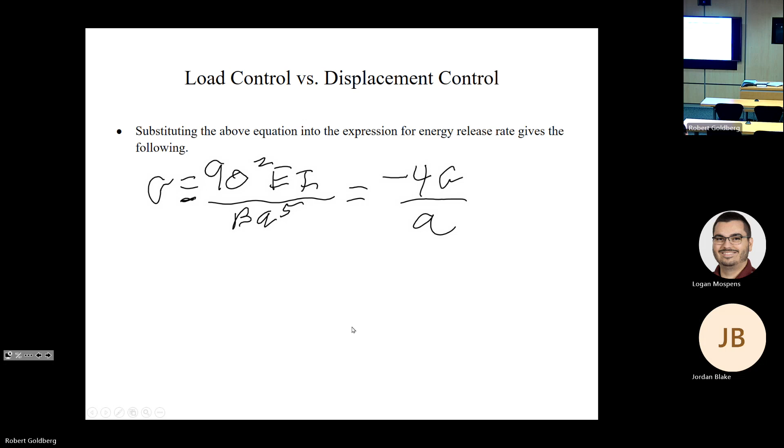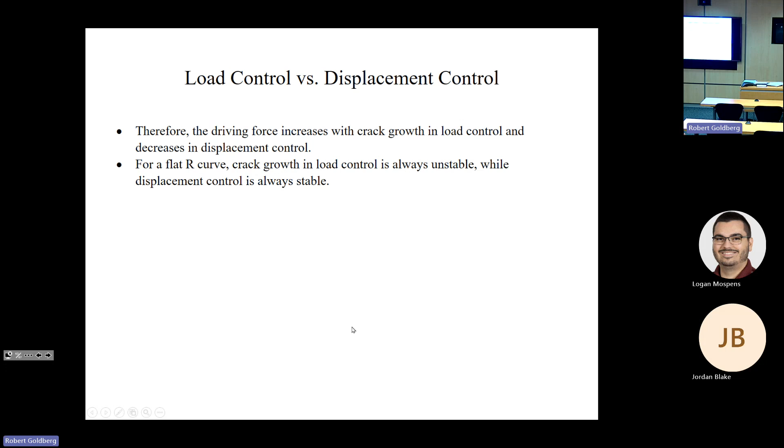Now, the last thing we'll cover today is, in real life, most real structures aren't pure load control and aren't pure displacement control. So a simple way of representing this is we have a spring in series with this structure. So we have a structure with the crack, and we have a spring in series with this flawed structure. The structure is fixed at a constant remote displacement, and the spring represents the system compliance.

So for the case of pure displacement control, the Cm would be equal to 0 because the spring would provide no resistance. The only thing we have is the applied displacement. However, for load control, if we set the Cm equal to infinity, we just pull on it, the spring provides no resistance, and all we're doing is providing a load to the structure. So when the system compliance is finite, somewhere between 0 and infinity, the point of fracture obviously lies somewhere between the extremes of pure load control and pure displacement control.

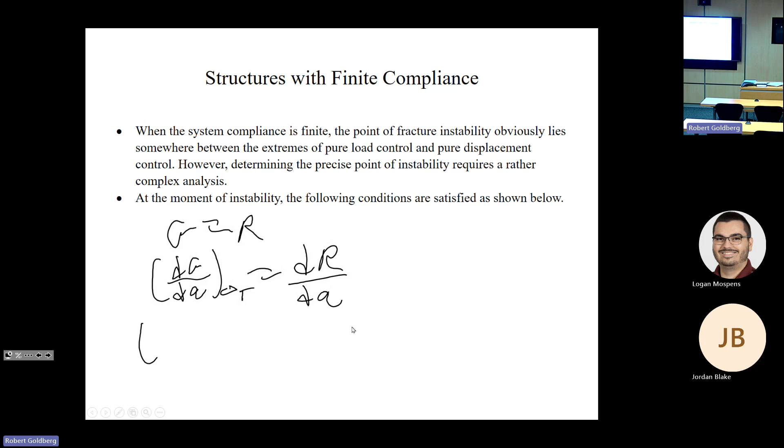And you can derive, we won't go through it here, it's a complicated analysis, that this rate of change is equal to the partial derivative of the strain energy release rate with respect to crack size, for the load, minus the partial derivative of G with respect to load for crack size times the partial derivative of the displacement with respect to crack size for the load, all of this multiplied by the compliance plus the partial derivative of the displacement with respect to the load for crack size, and this is all inverted.

So it's a complicated equation, but the idea is that everything else we did today was for simple cases of pure load control and pure displacement control, but in reality, the world isn't pure load control or pure displacement control. So it's obviously a much more complicated analysis, but there are methods to determine the onset of instability for these more complicated situations.